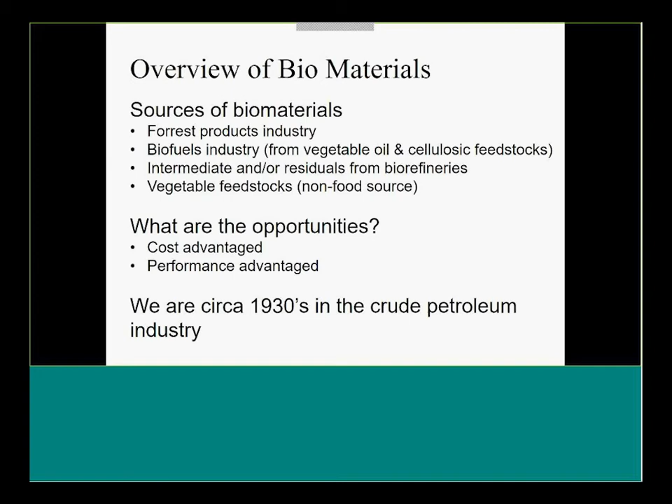And this is my words, but if we look at where we are in the refining industry, we're probably circa 1930s in terms of where the crude petroleum industry is, okay? So if we look at some of the polymers that we now use substantially in asphalt materials, those polymers were developed in the 1970s, okay? So here we are almost 40 years later in some cases, where we have common acceptance of these polymers in the asphalt industry. But it took probably 15 years before those polymers really got broad use in the early 90s, and that was part of the evolution and implementation of the Strategic Highway Research Program, what we know today as SuperPave.

Okay, so when we look at these different biomaterials in terms of opportunities, there exist opportunities in terms of asphalt extenders, asphalt partial or full replacement. We've done stuff that demonstrates that we can do this with our bio oil. Clearly, Evotherm is a warm mix asphalt technology, or compaction aid. We can use stuff that's a flux or a rejuvenator.

And I want to point out the important difference between a flux and a rejuvenator. A flux is a softening agent, okay? So it takes a stiff asphalt and makes it softer. But more or less, there's really not chemistry occurring when we add a soft material to the hard material, whereas the rejuvenator is facilitating some chemistry, so that the net result is the asphalt product with the rejuvenator is softer, okay? And so sometimes we want to throw fluxes and rejuvenators around and pool them together, but I think there needs to be a more clear distinction between those two, okay?

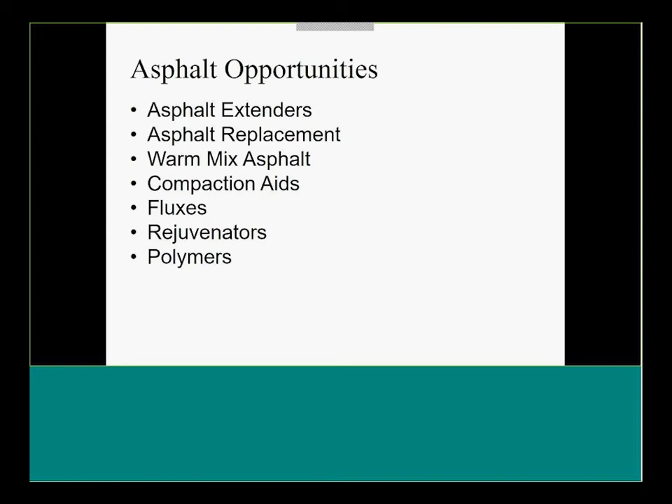And then we can get to polymers, okay? So we've been working hard on a lot of these different areas here at Iowa State, but I'm going to focus my attention more on the polymers moving forward. So let's talk biopolymers. In biopolymers, we have to first start with a feedstock material. In this case, we are using soybean oil. And we take that soybean oil and we have to epoxidize it, and so we create ring openings, and then we treat it with acrylic acid. So we have acrylated epoxidized soybean oil, what we refer to as AESO.

All right, but we can use all kinds of vegetable oils in producing these polymers. So we're not beholden to this soybean oil, okay? We can use distillers grain corn oil, corn oil, flaxseed oil, rapeseed oil. Those are the more common oils over in Europe to make our monomers, okay? So the monomers are just our feedstock molecules that we then chain together to make polymers. And what we're really focused on is making what we call a soft block of block copolymers.

Styrene is the hard block, if you will, whereas the butadiene is the soft block. So we have to also think about what will the future of asphalt modification be. Will we face a paradigm shift? Do we have the knowledge in the asphalt industry to address our future needs? What do we believe is the time scale of changes?

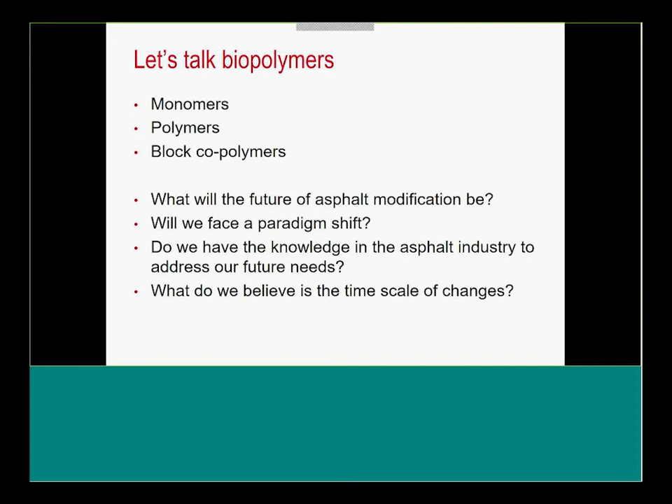What's the difference between the polymer we buy that goes in the asphalt versus the polymer someone else buys to make parts that go into human bodies? It's a certification of the polymer. And that's what creates the different pricing in the same polymer production run for the different industries. So when we're talking about asphalt modification, in the polymer industry we're viewed similarly as we are in the crude oil refining complex: well, you guys are the lower margin opportunities, but we do like your volumes.

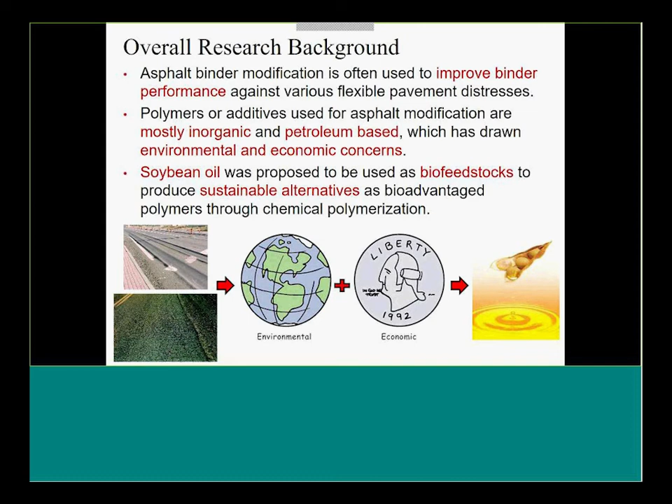I used soybean oil as a benchmark comparison because that's the commodity price that we can easily get our hands on in terms of pricing over the years. We can use distiller grain corn oil, which actually is a lower price, has a similar pricing trend as the soybean oil, but it is about $80 to $100 per ton less expensive.

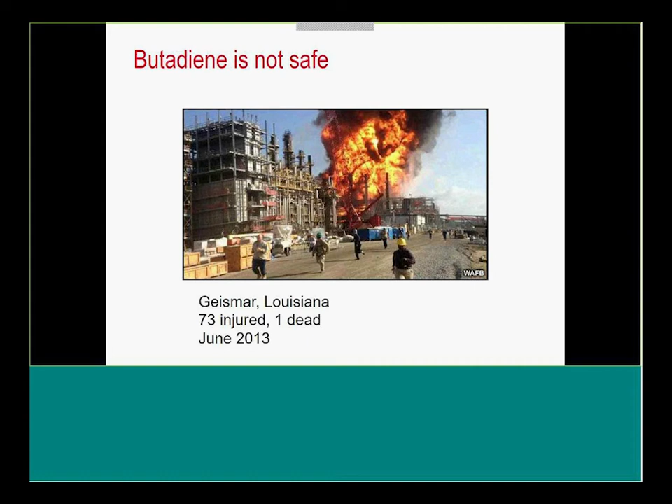We can look at the transport of butadiene, okay? Just the transport of butadiene itself is going to be kept under pressure or frozen. That incurs a $300 a ton transport cost. So this is where we had a derailment just south of Louisville, Kentucky. Hundreds and hundreds of people had been evacuated from homes.

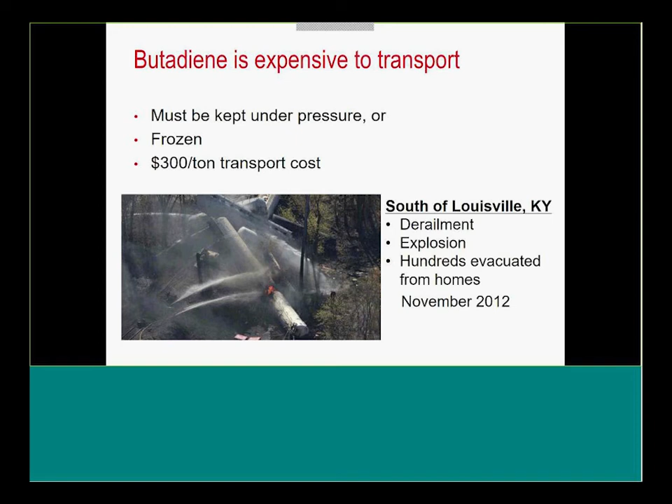You can see how they're trying to... This was a case where the cars were frozen. They're trying to maintain low temperature. You can see in the forefront of the picture how it's glowing orange there, and they're trying to keep control of that situation. If this had happened in an urban area, I'm sure that this would have affected many, many more people. Okay, so let's get into talking about vegetable oils.

They're biodegradable, renewable, cost-effective. They're less toxic than crude petroleum-derived materials. So when we produce our monomer, which is the analog to the butadiene, we don't have to keep it sealed. We don't have to put it under pressure. We don't have to freeze it to transport it, okay? So we're not going to be incurring that $300 a ton transport cost.

What we're dealing with is vegetable oils that are composed of triglyceride molecules that consist of 3 fatty acid chains and a glycerol backbone. We're looking at those vegetable oils being able to polymerize into biopolymers with flexible and rubbery properties. We're looking at attaining those elastic properties that we're interested in for asphalt, primarily for what? Yeah, improved fatigue, improved low temperature performance. The styrene gives us the stiffer component that increases the high temperature grade. The polybutadiene component provides us with those elastic properties in those block copolymers.

All right, so what are our goals? We're taking the bioadvantaged polymer, cost advantaged as well, and asphalt modification.

We want to do the binder characterization. We want to use polystyrene with our alternative to butadiene. We call it PESO. It's polystyrene block acrylated epoxidized soybean oil. As I mentioned before, we use the acrylated epoxidized soybean oil as a feedstock.

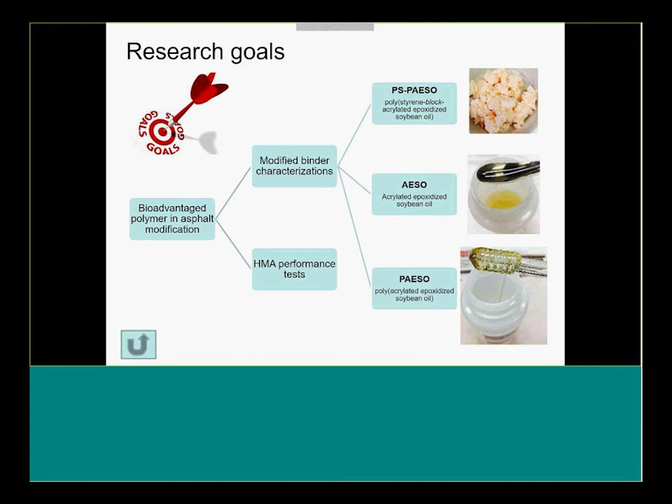But we've also seen that we don't necessarily even need the polystyrene for beneficial use. So we can enhance a 58-28 binder and create a 64 and substantially improve its elastic properties because we're adding the rubbery component. Okay? So this is what we're targeting here and doing. So what we're doing is taking the PAESO, copolymerizing a polystyrene. We're looking at this in different molecular weights and different contents of polystyrene.

And when we go to these block copolymer producers, we have to remember they are not producing a polymer that works only in asphalt. They're producing a polymer that works across a broad spectrum of block copolymer industry uses. So that's 25, 30, 35% styrene content. What we found, that's too much styrene for asphalt anyway. Styrene is actually more expensive than the polybutadiene in our block copolymers.

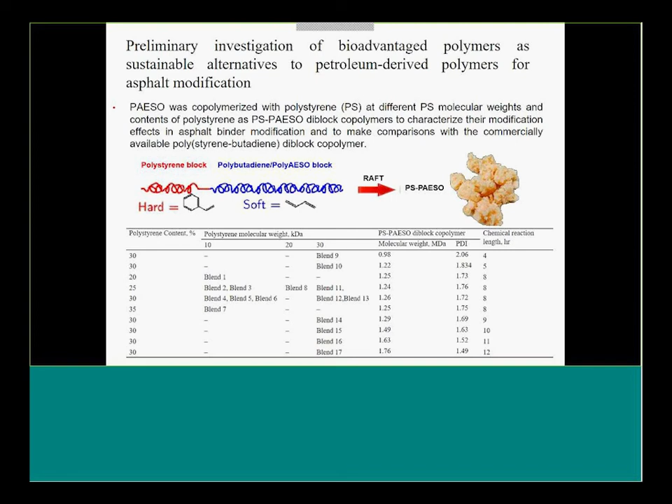So right off the bat, we're able to figure out that we can use more of our elastic rubbery phase component in the PAESO to create our polymers. And if we want to use a block copolymer with polystyrene, we don't need as much polystyrene either. That further economizes the block copolymers for use in asphalt. So there's no big surprise here. We do the chemistry and chemical engineering, working on things.

What I've learned in this process is that we do stuff in the lab, and round bottom flasks are perfect for reaction kinetics to occur, but we never use round bottom flasks in a chemical industry complex, full scale or pilot scale, to produce anything. And so we're dealing with ideal conditions in the lab somewhat. And as we scale this up, we've got to understand how long does it take for the chemistry to take place, and what is the conversion? Are we getting to 80% conversion? Are we getting to 90 or 95? How are we getting there? And so we have to understand the scale effects of this stuff.

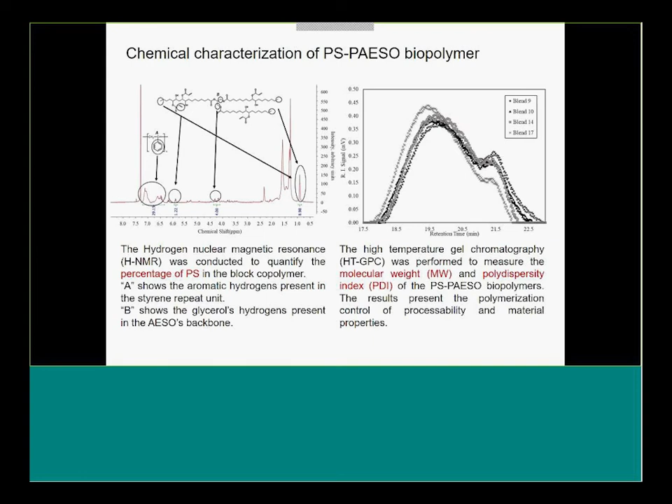So this is just a highlight that we are working on. We know that the rheology, the results in the bending beam rheometer, the results in the dynamic shear rheometer are going to be highly related to the analytical chemistry that has occurred, or in some cases not occurred, in the polymers. Okay? All right. This is just a highlight that, when we do the more classic styrene butadiene polymer introduction into asphalt, that's what we get on the left, okay? And we can see that matrix, okay?

When we see our polymers, we've got a different set of molecules. They're finer grained, if you will, but they're equally well dispersed into the asphalt matrix, okay? So we see in both slides here excellent polymer matrix that has been developed in the asphalt, okay? So we would be very pleased with these two slides to continue on and then do binder testing on these formulations. All right.

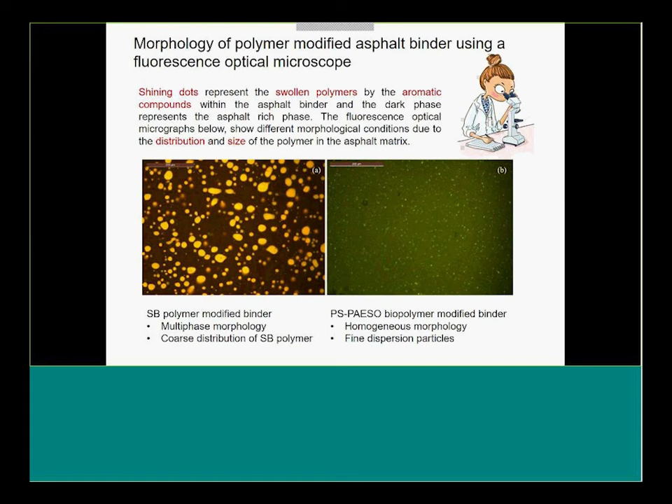So we've done lots of different formulations. I just highlight 17 different blends here. We've done hundreds of different blends, so this is just part of what we've been doing here. But what we're saying is, well, the industry analog is the styrene butadiene. We take on a continuous grade, it's 54 minus 34. I think it should have been a 52 minus 34.

But the net result is that between blend 1 and blend 7, obviously when we did blend 1, we said, all right, what do we believe is the right formulation in this particular polymer? We blended it, and lo and behold, good. It came out close to the standard industry analog of styrene butadiene, and very close in that continuous grade range. But blend 7 is not too far off either.

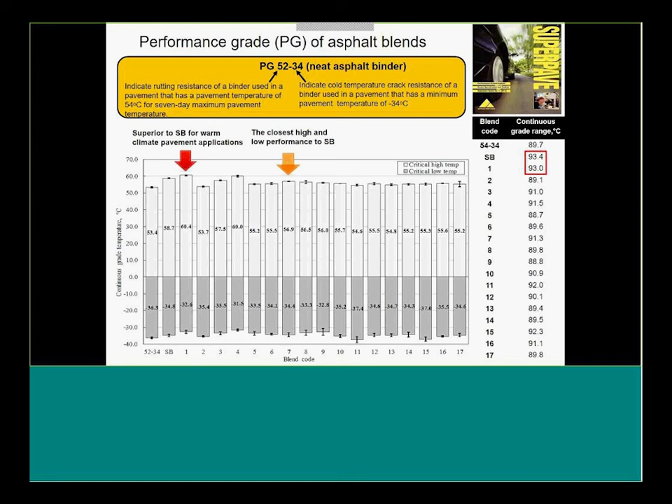Okay. So this is where we get into looking at some of the statistics, and we're verifying that there's a statistical difference between 20% polystyrene content versus 30, 35, and 25. And so what this is telling us is, in fact, we get enhanced high-temperature grade improvement using lower polystyrene content. So in asphalt, we're typically using 30 to 35% polystyrene, and so we're paying more for our polymers that isn't enhancing the performance of the asphalt.

Oh, yeah. How many people in the industry are aware of this? I bet almost none, other than the polymer science folks that have studied this in detail in asphalt. Okay. However, we do see the polystyrene on the low temperature end does tend to provide a little bit better performance on the low end. It's about a 2, maybe 3 degree improvement on the low end, but it's about a 4 to 5 degree improvement on the high end.

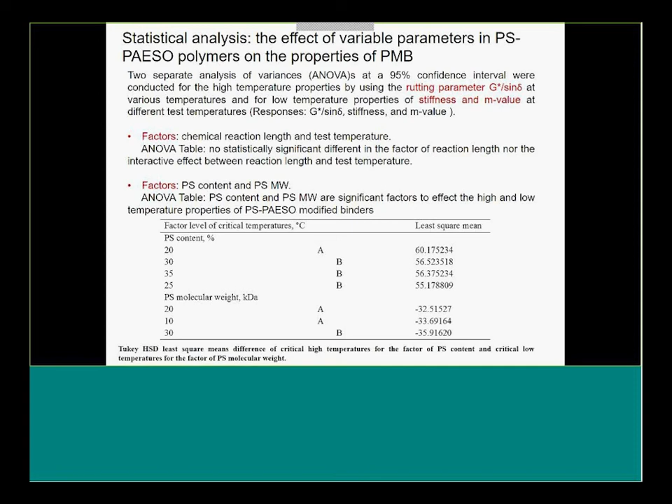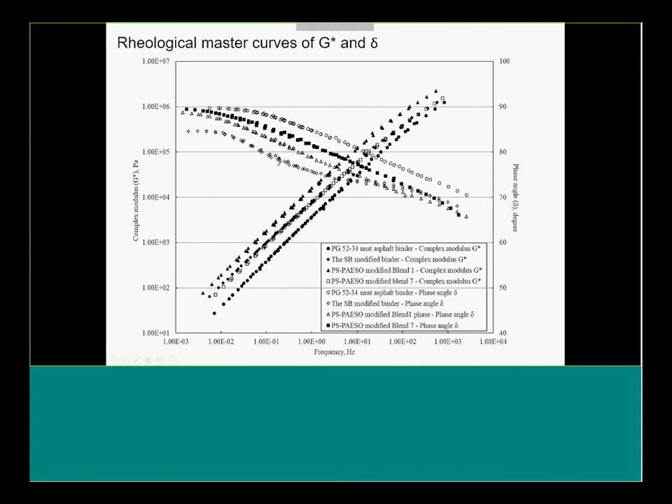Okay? All right. So now we go on to these things that we call focus groups, right? We all like focus groups, and we all want to come out with consensus, right? And there's some really good books out there about Steve Jobs. And Steve Jobs said it's really hard to design products by focus groups. A lot of times people don't know what they want until you show it to them. Okay? That was Steve Jobs. Probably one of the best thinkers in technology in our generation, or maybe half a generation ahead of us, if you will.

But unbelievable thinker.

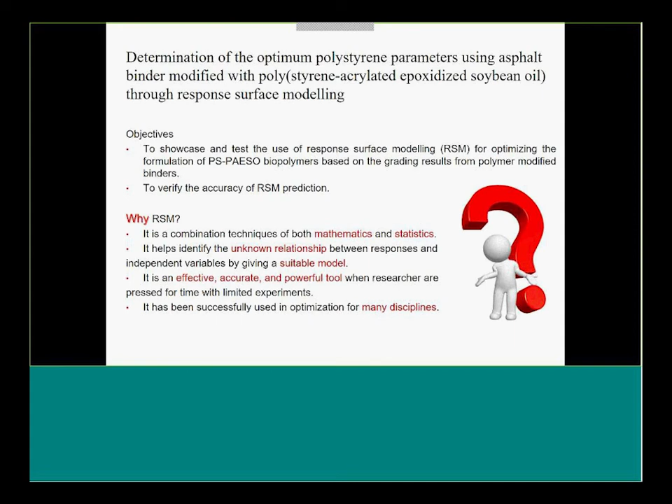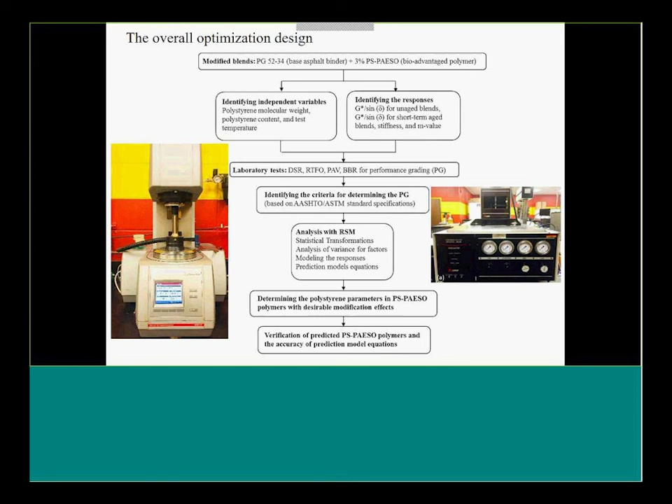All right. So what we're now trying to do is saying, all right, we've got these different blends, there's different results. Can we come up with statistical models that we can then use to do formulation of the biopolymers for use in asphalt? And the answer is absolutely. This just highlights that we go through the high temperature testing, the low temperature testing, and we have different criteria, and that we can establish these different models.

And we can then use these models to say, all right, if we're going to do a formulation and modify an asphalt, what's the molecular weight of the styrene, which then drives the molecular weight of our PAESO, and we have to have matching corresponding molecular weights that marry well together. And then we have to understand what the polystyrene content is, and therefore we know the content of the PAESO.

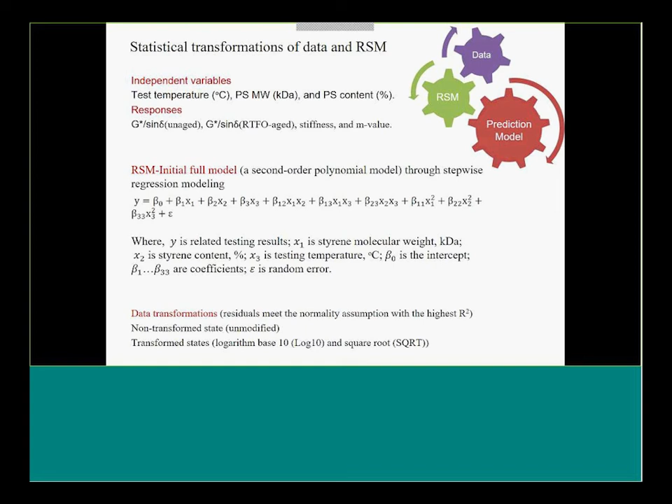So we go through this exercise, and we take a Flint Hills 52-34, and we say, what's it going to take to make this a 64-28? This is just some of the data from different amounts here. And so we say, well, basically if we want to get there, we want to push that molecular weight up higher to get us to the lower temperature criteria on the one hand. But the polystyrene content's only at 5%. That's a lot lower than what we're buying in today's block copolymers that are 30 or 35%.

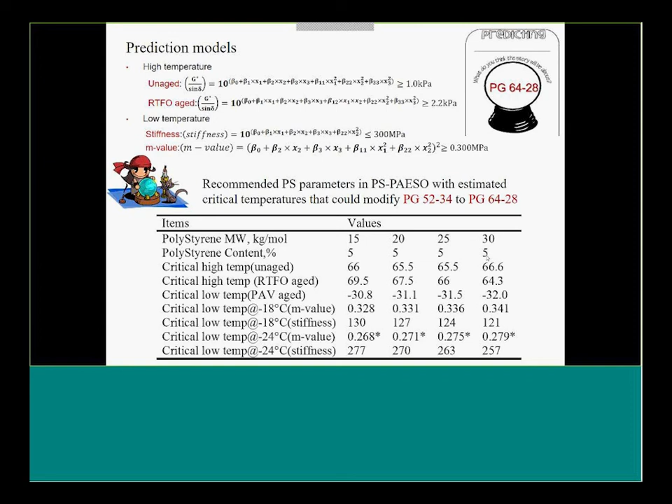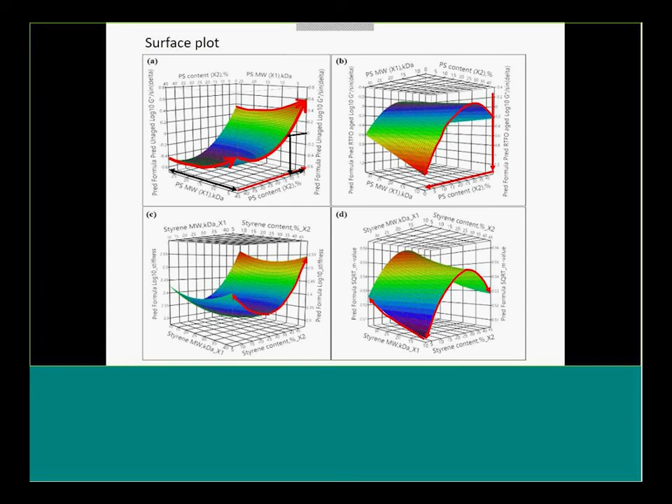So lo and behold, we can come up with what we call surface plots, and we can come up with what we believe is the optimum formulation. We produce the polymer, and then we blend it in the asphalt, and look, we've done a great job. Here's the 52-34, continuous grade range of about 90 degrees. We use the styrene butadiene analog, again loaded in at 3% by total weight of the binder, at 93.5. When we do our formulation here, we come out with 97. So now we've developed what industry's going to need to produce these biopolymers for use in asphalt technology.

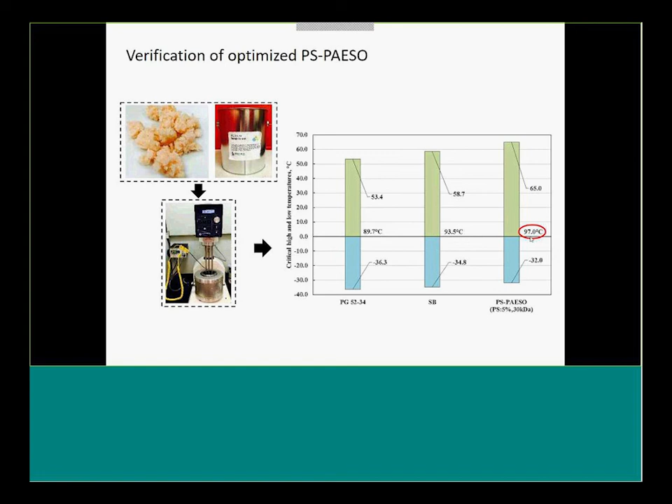So now we're getting to the point where we are excited about this. We've walked in on the right feedstock, the right molecular weight, the right balance between the polystyrene and what we call our biobutadiene, or PAESO. So what do we need to do now? Well, we want to go to mix testing. So we develop a gradation, and we're in the process of going through the mix testing, which is dynamic modulus that we can use as inputs for Pavement ME, and low temperature testing. We like the disc-shaped compact tension test, but some people advocate for the SCB, so we do both of them.

We want to do the indirect tensile for moisture sensitivity. A lot of states still use that. We prefer the Hamburg, quite frankly. But again, we do a broad range of tests to make sure that we're going to have adequate performance. So we've got the mix design. We're in the process of going through that testing, so I don't have those mix tests to share with you here today.

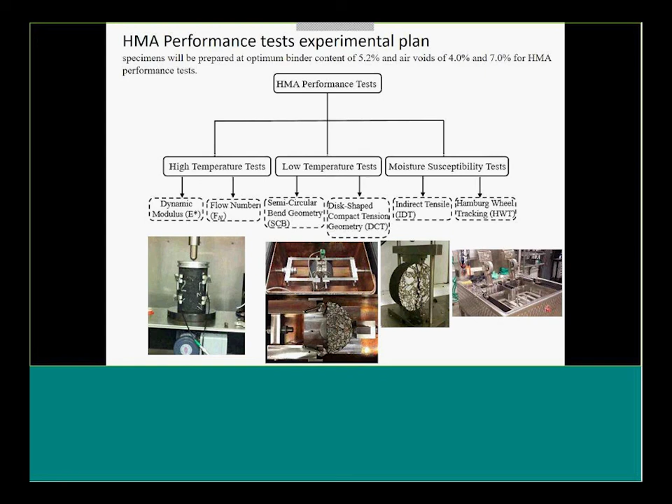Now this was another pretty famous person that outlined things in the scientific community. And he said, why is it that you physicists, so it's kind of dating ourselves to the 1940s, 50s, maybe 60s, why is it that you physicists always require so much expensive equipment? Now, the Department of Mathematics requires nothing but money for paper, pencils, and erasers. And the Department of Philosophy is better still. It doesn't even ask for erasers. And that was Isaac Asimov that quoted that.

And so we put in place a pilot plant. It's over $6 million in the design and the construction. And this is not like a GE toaster oven. It's not like you plug it in, you turn the dial, you want it lighter, you want it darker toast, and then through a couple of experimentations, running toast through the toaster, you figure out where your preferred setting is.

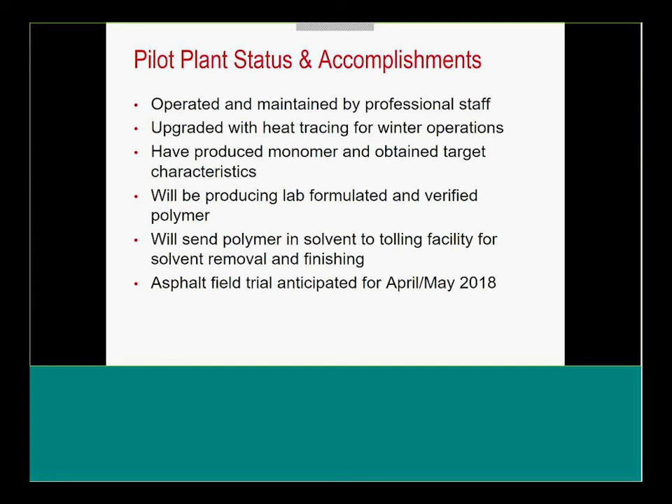I do want to acknowledge a lot of entities have put monies into this, including the Iowa DOT, NCHRP, the Iowa Soybean Association, U.S. Soybean Board, National Science Foundation, U.S. Department of Ag, Iowa Board of Regents that oversees the three main institutions in the state of Iowa, and of course the licensee, which is Seneca Petroleum or Argo Genesis Chemical.

Okay, and with that, I do want to recognize Eric Cochran, Nacu Hernandez, Austin Hohmann, Michael Forrester. Eric's a brilliant polymer person, one of the best in the U.S., probably the world. He got his PhD at the famous polymer research group at the University of Minnesota, and we were able to convince him to come to Iowa State. He grew up in Minnesota over in Rochester, but he came to Iowa State for his undergrad. So we were able to convince him to come back to Iowa after he finished his PhD.

Then Andy Cascione, who you guys know, he works with Flint Hills. Savannah Chen, who helped substantially in portions of this presentation. Ashley Buss has been involved with some of the stuff, more on the adhesive side. And I probably need another slide or two to highlight all the other people, professional staff, graduate as well as undergraduate students, that have been involved in all this work.